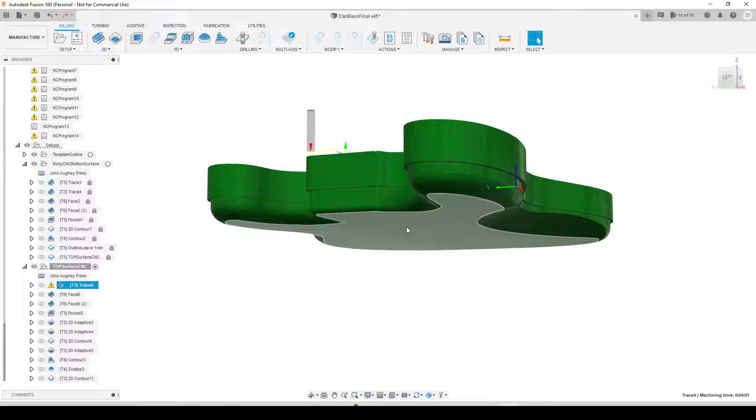So one of the first things we have to do is align the guitar to the table and secure it somehow. The center point is going to be right here. I'm going to calibrate the machine against the hard stop switches on the machine, so that way it can be repeatable without having to recenter it.

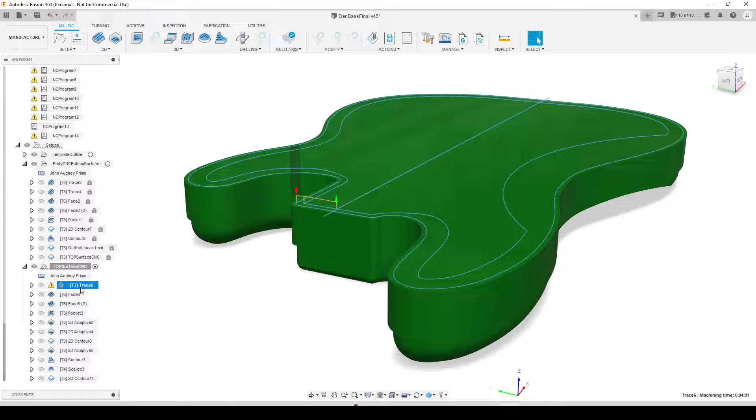So to align this to the table, I have a tracing operation. This tracing operation is going to draw this blue profile on the surface of the table. It's going to actually route that into the spoil board using a very small bit, and that is going to give me an outline of the guitar. This outline matches exactly to the bottom profile that I cut.

So there's two profiles there you see. The outer profile matches this outer rim here, and this inner profile there will match where the chamfer, where this meets the board.

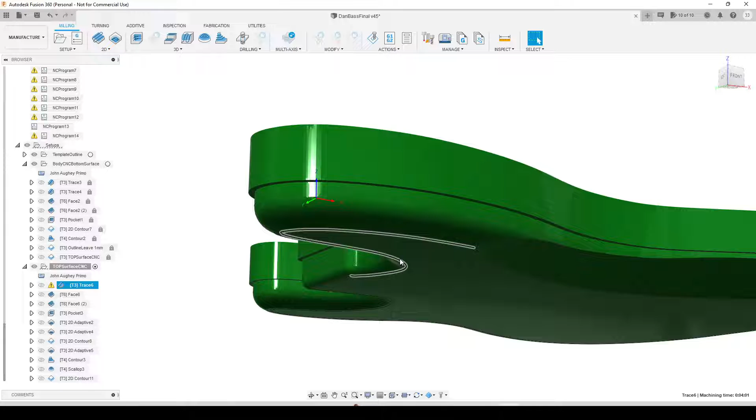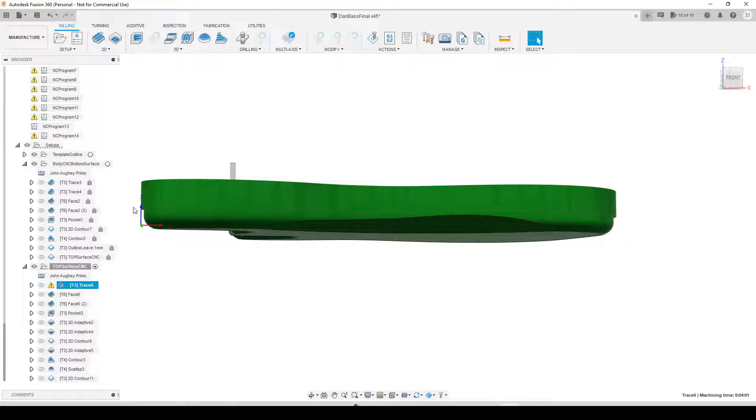Ideally, here's my hope. I know I'll see this outside line and can hold a flat edge or piece of wood up against this plate right there and see that aligns to the slot that I cut into the board. And if I line the front and the back up side to side at many different points, I should be very confident that this is in the right spot. And we will secure it from there.

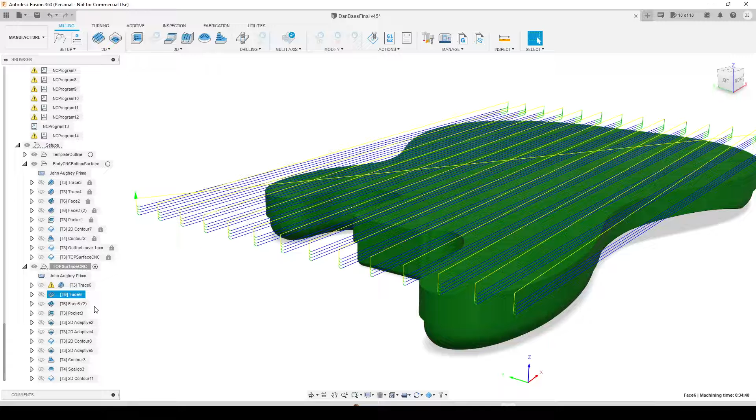Okay, real quickly through this. The first operation is a rough facing operation. Actually goes 4 passes down through the material, taking only, I believe, 2 millimeters off at a time. This worked very well before without making a lot of smoke or any horrible noises. We do a finishing facing pass, taking off the last 0.2 of a millimeter, and that gets a really nice smooth finish. Just a light sanding to take that down.

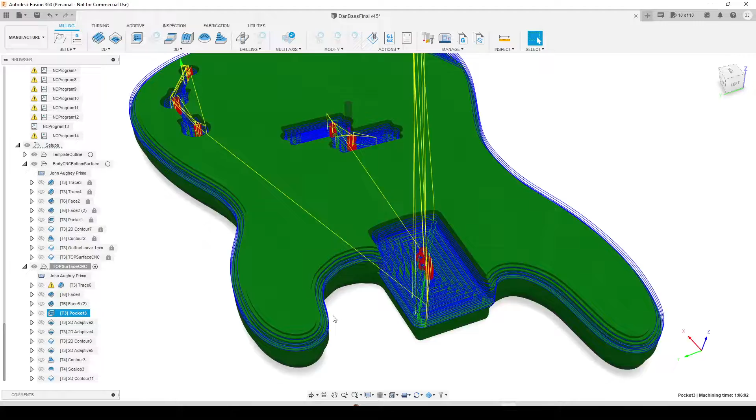Okay, pocket operation. This is a long one. We are roughing out all of the cavities that we have here, including the neck, the pickups, the electronics, and this is leaving the stair step here, the same thing that we did on the other side. We'll smooth that over with the contour bit later on. This is leaving 0.5 millimeter of material left over.

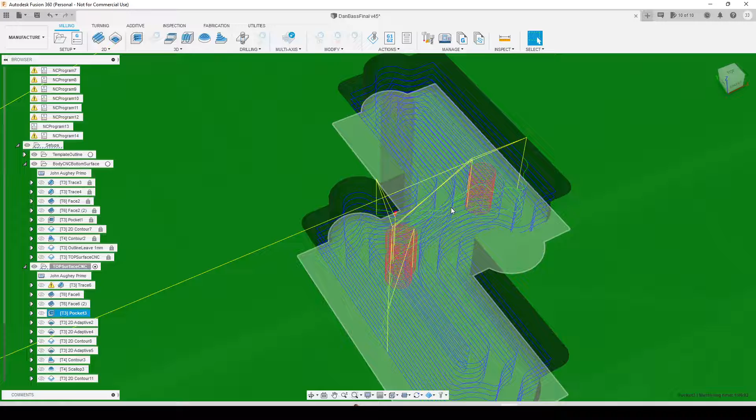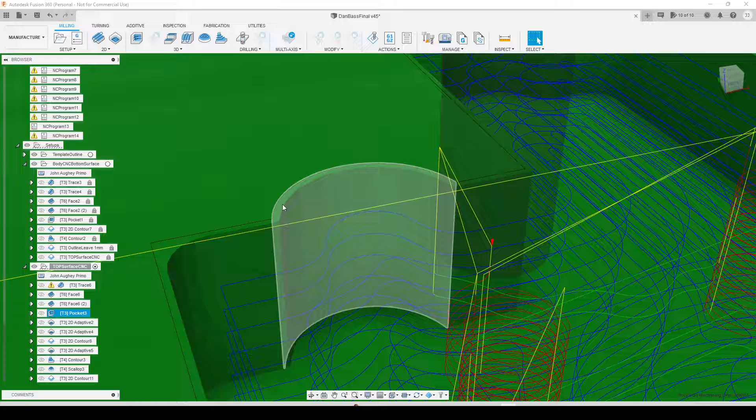So the next step here is to take off that last 0.5 millimeter inside the pickup cavities. So if you look at the previous step here versus this, you're going to see that it's removing just a little bit extra material. There we go. So there's that 0.5 millimeter material it has to take off, and this final stage is taking that off and removing another 0.5 millimeter on the bottom. Same deal here with the electronics cavity, just taking off that last 0.5 millimeter.

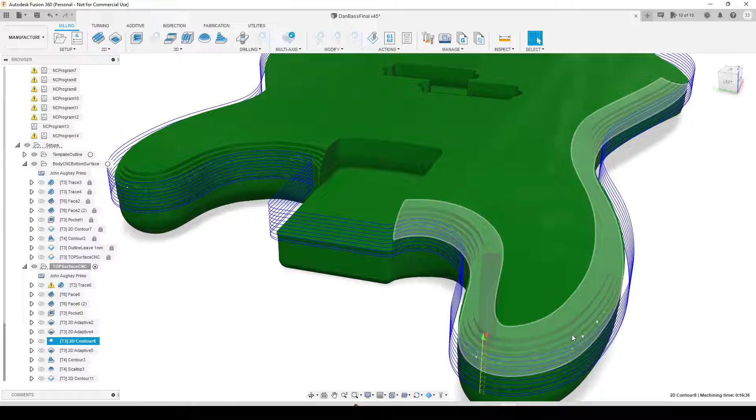Now we go around the outside. What does that sound? We go around the outside. This is actually to take off any material that was left in the roughing stage. Notice there was, especially in some areas over here, some extra raw material that was left over. So this is just going around the very outside perimeter, taking off anything that is offensive.

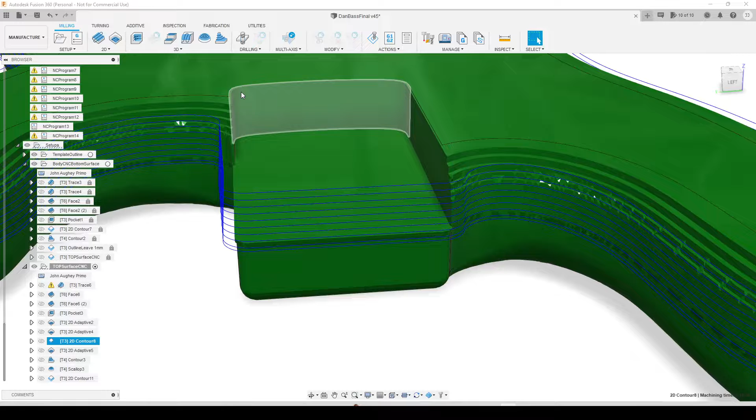Now we're going to do kind of the same work that we did here, taking off that last 0.5 millimeter from the neck cavity. The pass between these two, it's hard to see, but it's taking off that last little 0.5 millimeter there and making this nice and flat. And at that point, we've done all of the major roughing.

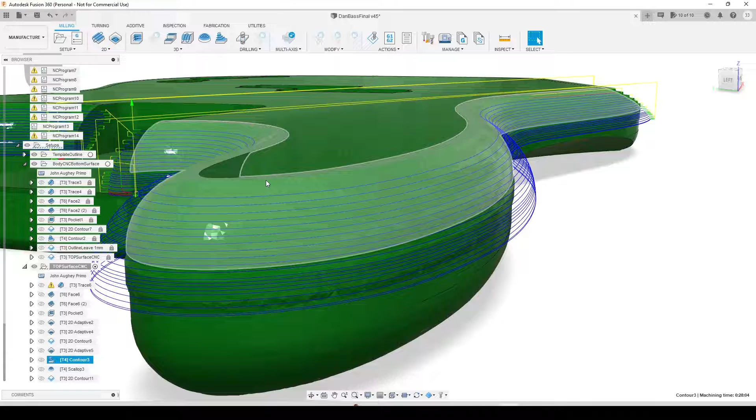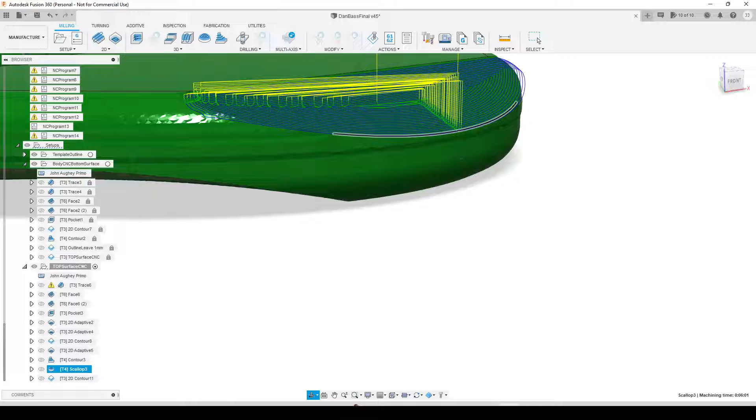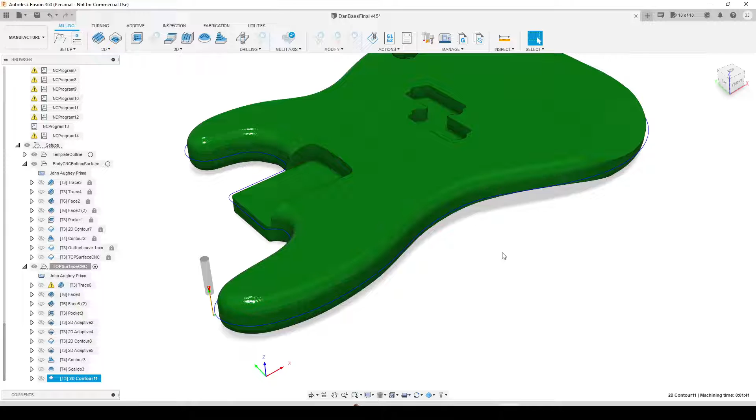And then finally we do one more pass around the outside to take that last little bit and give us our outside dimension. So I believe we are ready. We're going to spend probably a good hour or so making sure that we get this in the right spot, held down securely, and nothing's going to move. And we're ready to go. Rock and roll.